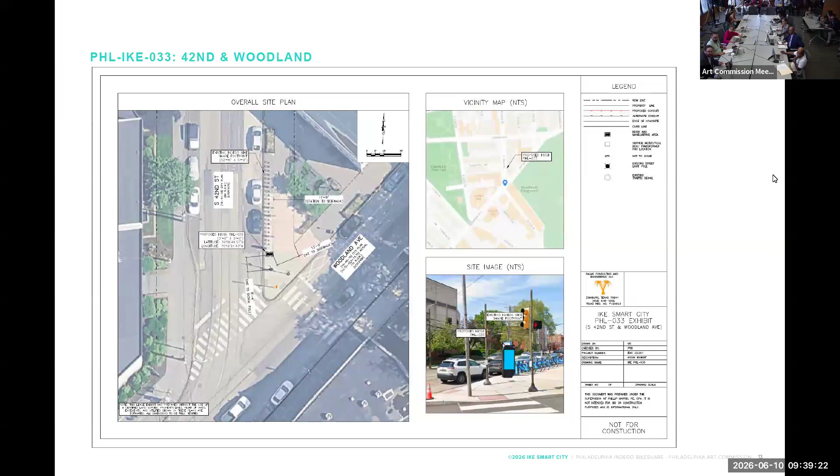And am I correct in understanding also that some replace prior models of information posts? So it depends on the age of the station. The older bike share stations have a larger pylon, the newer ones don't. So it depends, you can see on the individual drawings if they have this older one, so there'd be 2.

The one is like the brains of the station. The newer ones don't have the large pylon, it's much smaller. And then the Ike is an additional piece, let me see if I can find a good one. This is a newer bike share station, so it doesn't have a large pylon, it's just the Ike on the right.

So what is the reason for leaving the old one? The old one is like the brains of the bike share station, so this is an old one, the existing is in the middle, and then the Ike is on the right. Right, but all of them don't have that. I think we'll have someone who can help answer. Thank you, yeah, just trying to understand.

Yeah, no problem. Good morning. The mechanics, did I explain that right? You did, yeah, you did a great job.

Good morning, Commissioners. My name is Laura Bowles, I'm the planning manager for the Indego Bike Share System. So when we launched in 2015, we launched with what is considered the second generation of the technology, which has that large brain attached to it. So when we use the second generation of technology, we cannot remove that brain, otherwise the station will not work.

So over time, as this tech is just getting old, it's been out in Philly streets for 10 years, that tech is being replaced with newer tech, but we are not going to scrap all of our existing stations and replace it with the new technology. Thank you. James?

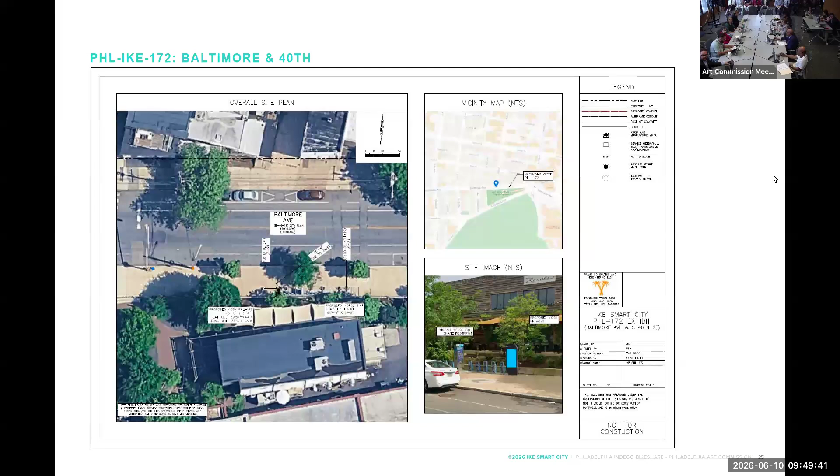We have a presentation for final review. This is the 59th Street Bridge.

Question, when were they last here? Ryan Sen from the Streets Department is here, and then we have someone in the virtual audience as a presenter also, two or more months ago. Two? Good job.

Hello, Commissioners. Good morning. My name is Ryan Sen, I'm Streets Department's Chief Bridge Engineer. Virtually joining is Matt Ward from the consultant bridge design team. Also joined by some others from the city staff who are helping progress this project.

So 59th Street, we presented for conceptual review back in November of last year. There were many very good points raised. We had a bit of homework to do, primarily to go back out to the community and make sure that some of these topics that you raised last time are fully thought through and fully addressed. That's what we've spent the last several months doing. We're back here to present on that. We've prepared a slideshow. The first half of it, I would say, is what you saw last time. The latter half addresses the concerns that were raised.

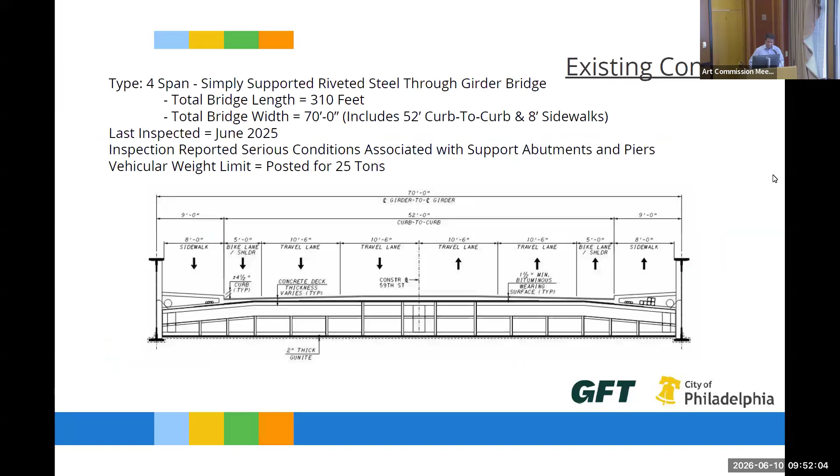Okay, so here was some of the supporting documentation addressing the specific topics that were brought up. I'm going to go to the slides, and when we get to the slides that deal with the issues, stop me if I'm going through it too fast. I'll go right back to the beginning.

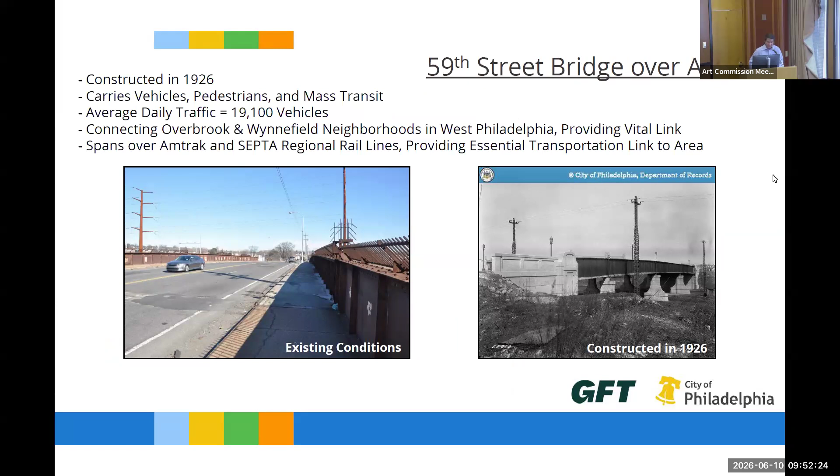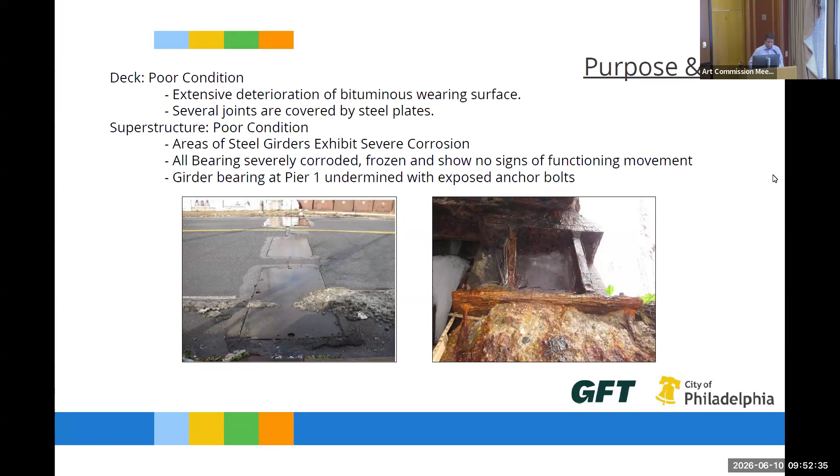59th Street Bridge, I believe we're all familiar with the location up in the Overbrook and Wynnefield neighborhoods. Here's a picture today on the left side, a picture from around when it was constructed back in the 1920s. Here is the existing cross section. This is all material that we shared last time. Existing photos of the bridge showing why this bridge is in poor condition and the project needs to occur. More photos showing the level of deterioration that we're seeing out there.

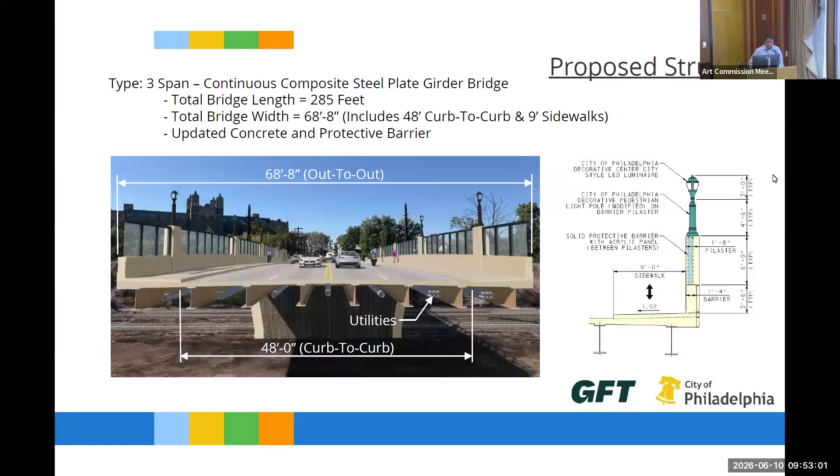This was a rendering showing the cross section that's proposed, showing that it'll operate similar to how it operates today, except that we're going to widen the sidewalks, designate them a shared use path so that cyclists and pedestrians can use them. The current sidewalks are 8 foot wide. In the proposed condition, they're going to be 9 foot wide.

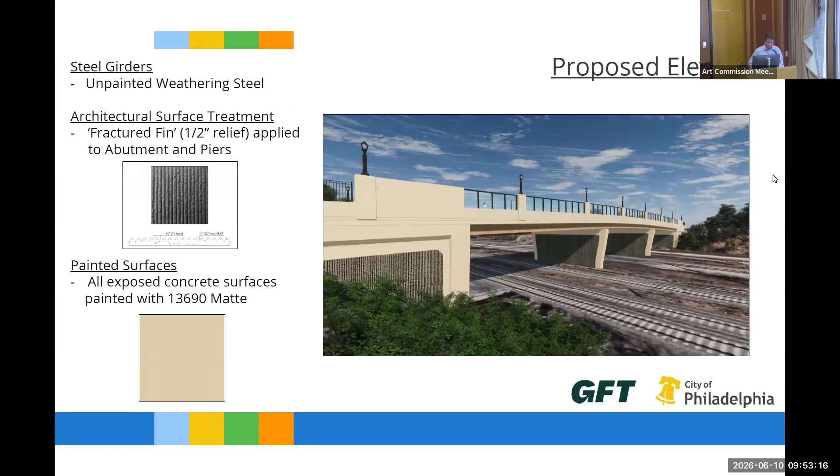These were showing the different architectural treatments that we're proposing, the fractured fin finish on the abutments, and the color we were selecting here was that matte kind of beige color. These were some slides showing how it would look from the pedestrian experience, showing all the different features. And some of these are subject to what we're about to talk about, so just flipping through existing.

So now we get to the first concern, which was related to graffiti deterrence. And it's a great point. We believe that we're going to be providing surfaces on the four quadrants of the bridge for future artwork. We are going to be adding an item to the contract to apply anti-graffiti coating, and that will help make it so that the graffiti can be removed much quicker.

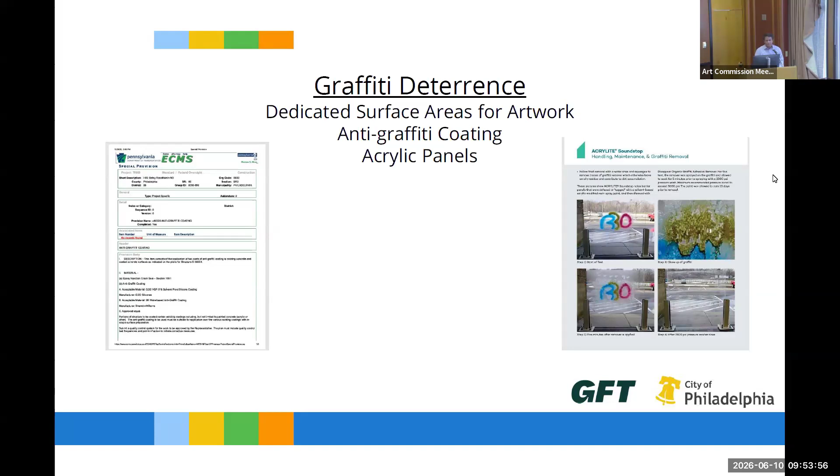When it comes to the wall materiality, you wanted us to look into different materials to face the walls and the bridge, and I think it was tied back to the objective of preventing graffiti. So with the first topic, we're addressing the graffiti by applying that graffiti coating, graffiti removal coating.

When it comes to wall materiality, we did look into applying a kind of stone finish. What we found is that in order to do it over the railroad, if we were to apply real stone to the inside face, we'd want to apply it to the outside face too, but that becomes a problem with the railroad, making sure the stones don't come loose over time and fall onto the railroad below.

We looked at form liners and painted form liners, but we didn't feel that solved the initial problem of graffiti coating, and it might actually complicate addressing the graffiti if it does get tagged. Additionally, it honestly doesn't look as good as natural stone in the first place. So we believe staying with the concrete barrier is the way to go, just beefing up the graffiti protection.

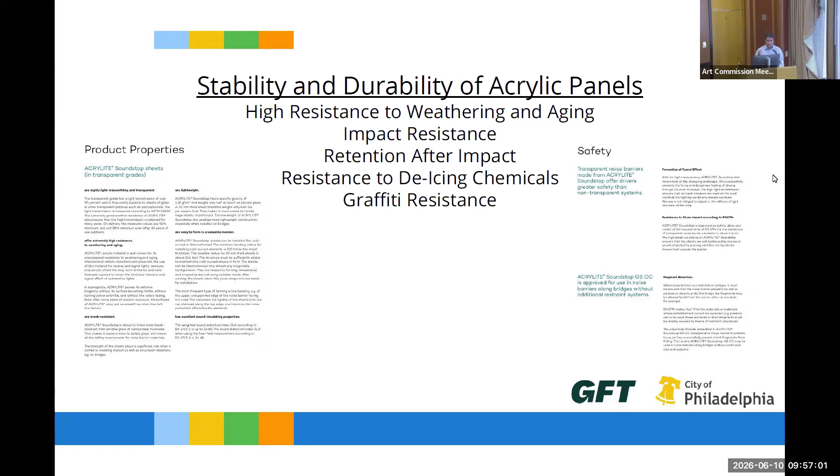They're going to be clear, so they let sunlight through. It's not going to cast odd shadows on the bridge. It'll create a much more open feel for bridge users crossing. It also holds up well to the weathering salt we apply in the winter time, so we think this is a very durable solution. It's been used on the 41st Street Bridge and several PennDOT projects in this area.

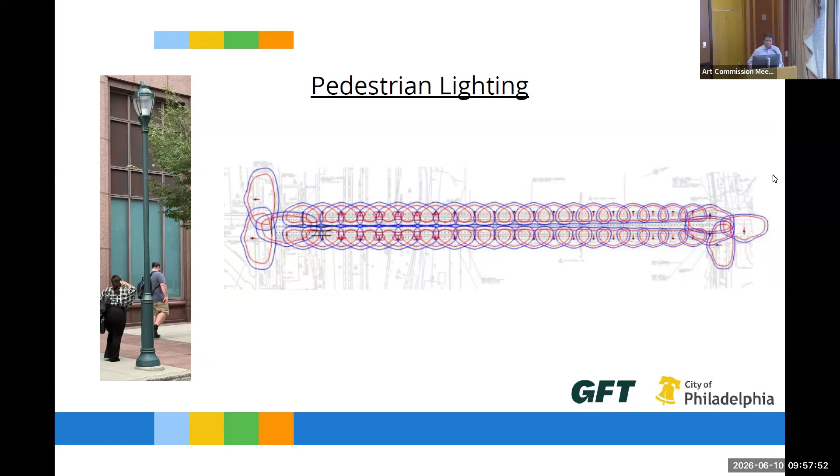This is what I was talking about earlier, that there's going to be a dedicated area on all 4 quadrants of the bridge for future artwork.

We did reach out to the community. After talking here in November, we coordinated with SEPTA and got to the bottom of a couple things about student access. We then went to the community twice in April, once at Overbrook High School on April 8th, and on April 30th on the other side of the bridge in the Wynnefield community at Masterman Charter Elementary School. We presented to the community both times.

The general consensus was that they understand the project is overdue and needed. There were concerns raised about student access during construction, since the bridge is going to be closed for 2 years, 26 months.

We are able to say now that any student who walks across the bridge will be eligible for a SEPTA key card during construction, so they will be able to take the SEPTA G route that's up there.

The specific detour route of the G will be determined by SEPTA as we get closer to construction, but the detour route will make all students who walk eligible for a key card. They will get that through their school, and the school will coordinate with the school district and the Department of Ed on all of that.

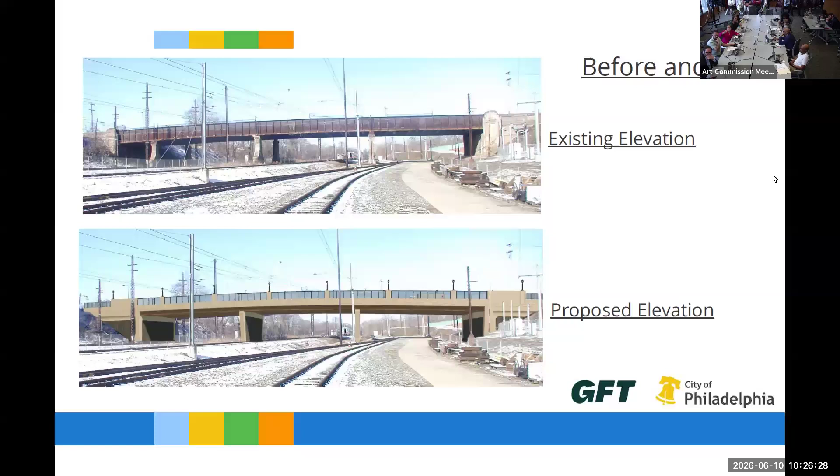Thank you, I think that's helpful. The other question I have is, this clear acrylic almost wall on both sides of the bridge, are there going to be dangerous for birds? For example, is there any kind of texture or something that avoids birds from crashing against it?

I just want to add to that response. The products that we are looking at to use for the acrylic panels do have filaments that are actually embedded into the acrylic panel that are designed for bird impacts. So it's been shown that using this filament process does deter that.

Thank you. Okay, so I'm going to wrap up this item. There are two things - Troy, do you need to see the renderings of the bridge to make your vote decision clear?

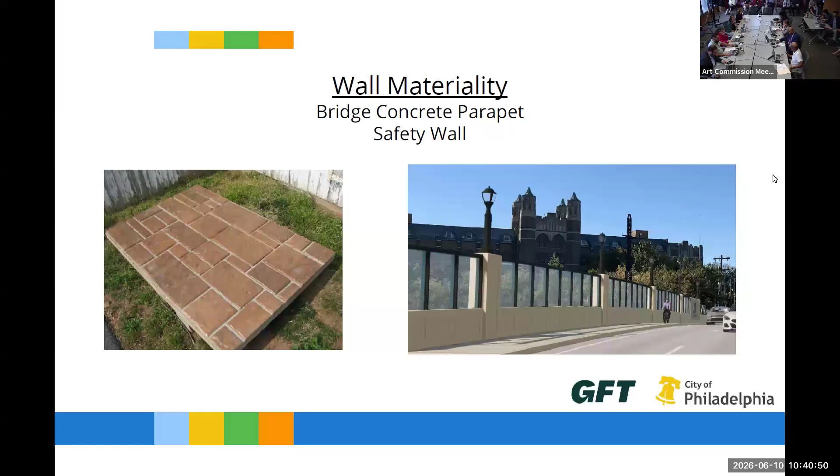Up next, we have a presentation for concept review. This is the Avenue of the Arts Median Project, a sculpture at South Broad and Spruce and Pine Streets.

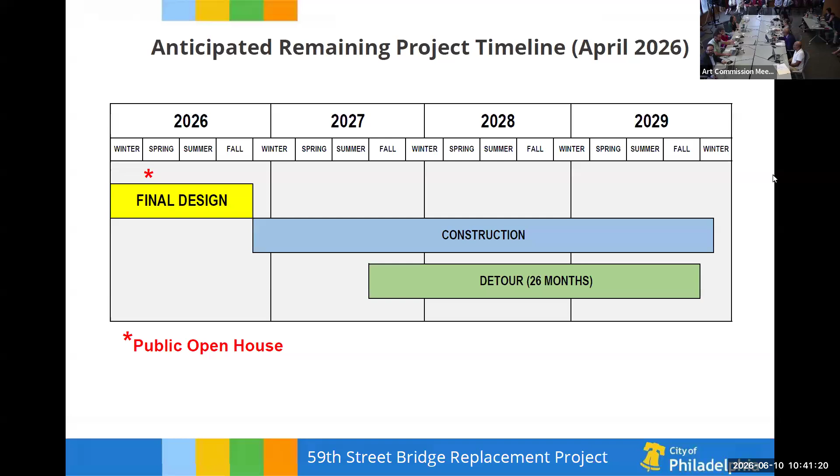Yeah, I mean, I kind of just... Yeah, yeah, it's ugly, and I think they think it looks neat, but it's like, it looks inhumane. Like, it doesn't look lived in. Miguel, that's you? We're ready. I mean, you see that in restaurants now, they have like the exposed brick, or some element of the original fabric, just slapping something over it. It's just like gross. Whenever you're ready, you can start.

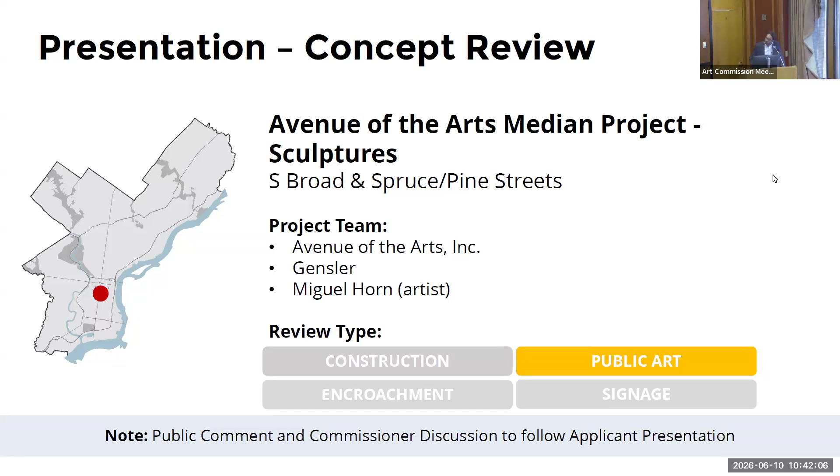All right, yeah, good morning. Thank you, good to see you all again. Commissioner Matt, good to see you back at the Art Commission. Thank you, doing better. So, this is actually a really exciting project to present to you all. I'm super excited about this because this has been a project I've been dreaming of realizing for the better part of a decade.

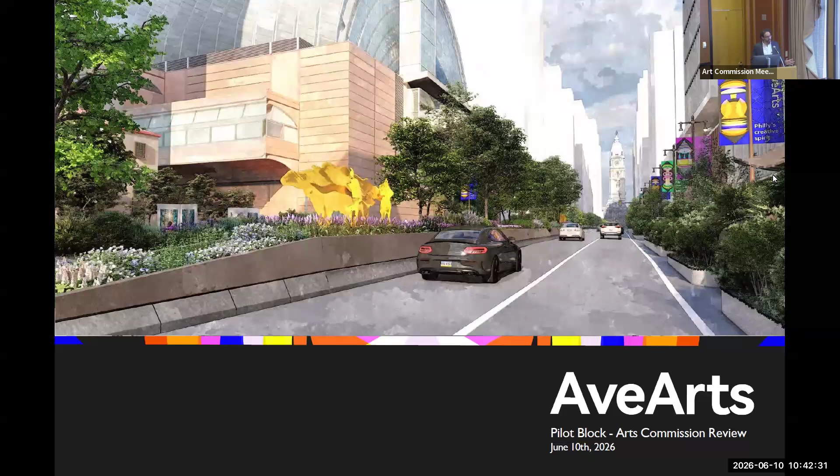And when this opportunity was first introduced to me, I received a call from Julia Guerrero, Civic Centered, and Tom Miles, who's on the committee for the Avenue of the Arts. I had no idea about this envisioning for South Broad and Avenue of the Arts 2.0. So as I learned more about this project, I just fell in love with what is going on in South Broad. This is such a cool project to be a part of, such a cool project for our city.

And I just wanted to start out by giving a little bit of context of this space. The median for South Broad Street, which is again being called Avenue of the Arts 2.0, is getting a pilot median reimagining, which is ongoing, is happening right now, and is actually pretty well on its way. This commission, or members of this commission, saw the median presentation previously. So for those who are not part of it, just a couple slides here to give you some locations.

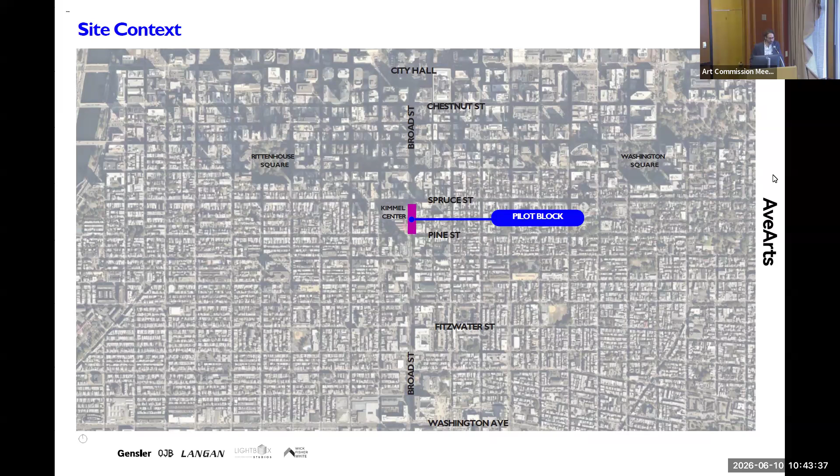And if you've seen the construction in South Broad, the Spruce-Pine block just in front of Kimmel Center, Arthaus, the VIA, Village of Industry and Art, is smack dab in the middle of what's being described as the theater district. You can see where this fits into the kind of future plan of the closer blocks to City Hall, and then the further extent. All of these blocks have an envisioned plan by Gensler Architects to engage throughout this dynamic public space.

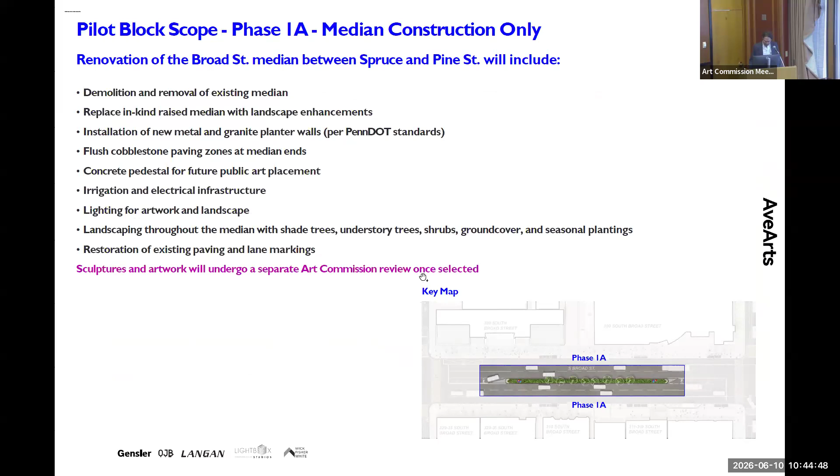So I'm super honored to be the pilot artist for this pilot project. You can see these plans have described parts of this median. There's modifications to raise up this central barrier, include some trees across it, and then there's these kind of sloped areas that rise up to the full height of the median at either terminus. And when this was first proposed, you could see at the very bottom it points out, sculpture and artwork will undergo its separate art commission review. So that's what we're here for today.

This shows the extents of the Phase 1A median, the dimensions of this first span. This is an updated slide of the trees and their locations. The species have not changed since the original presentation, but their orientation and placement have shifted together to allow our art installation at either end to have a bit more space.

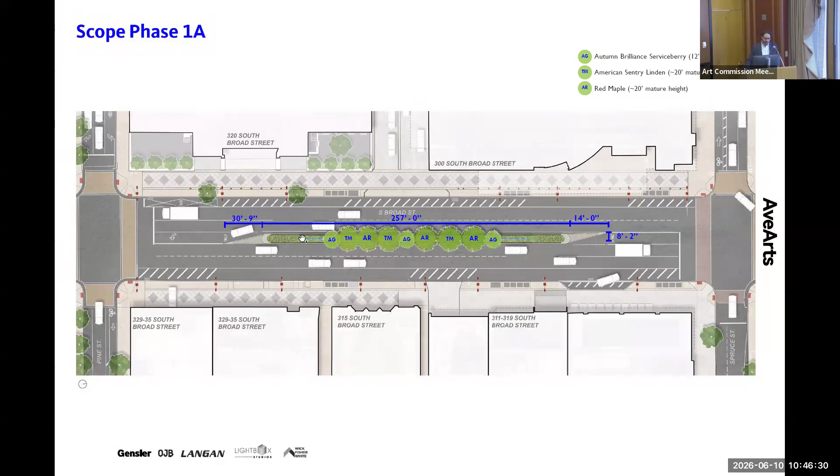If you look just outside of these two outside trees, you can see a connotation of this squiggly line of what we're looking at.

So design inspiration for my piece, my proposal today, comes from Broad Street itself. For the past 10 years, the better part of that, I've been using LiDAR scanning equipment to capture existing conditions for sculpture projects and installations. It's basically a tripod-mounted 3D scanner that spins around and captures architecture, space, static elements.

But what I didn't realize was happening at the same time was, as you can see at the lower part of this presentation, anything passing in front of this scanner is also being collected. So as I was standing in front of the Pennsylvania Academy of Fine Arts building, I thought this would be a beautiful piece of architecture to scan and capture.

This woman was just sitting at her phone, sending a really involved text. You can see at the bottom right, the scanner was positioned in front of her, so it only captured like a leaf of her form, a small digital fragment of that pedestrian, standing there having a very personal moment.

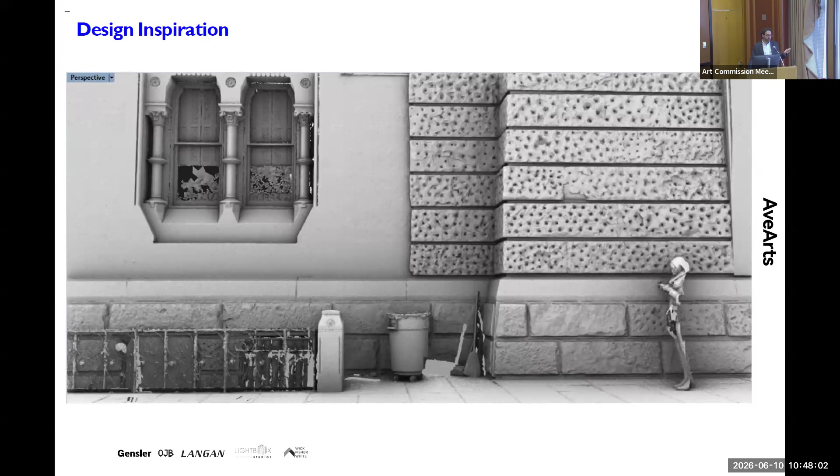As I moved the computer software around to the side of her, I saw that she was just this simple shell that when viewed from one side looks completely normal and natural. But as we move around her, we see this is an artifact of the scanning process. I found this to be an incredibly interesting aberration from this very technical engineering process.

As I floated through all of these different sites, I found all of these pedestrians, all these Philadelphians just going about their day, enjoying these public spaces. This guy was mean mugging me the whole time because he was really like, what is he doing, what is that piece of equipment, I don't trust you. But you see these survey guys around the city all the time, and this is the equipment being used for that.

But what it's not used for is capturing anything that's not static. So this section of the Reading Terminal Market at Filbert Street was just flooded with pedestrians walking by, and these movements across this space created this tapestry of figurative elements, abstractions, and I fell in love with this. For the past 10 years I've been writing grants and proposals, submitting this kind of work for other opportunities, and thankfully I found people who have a vision to see what I'm looking at here.

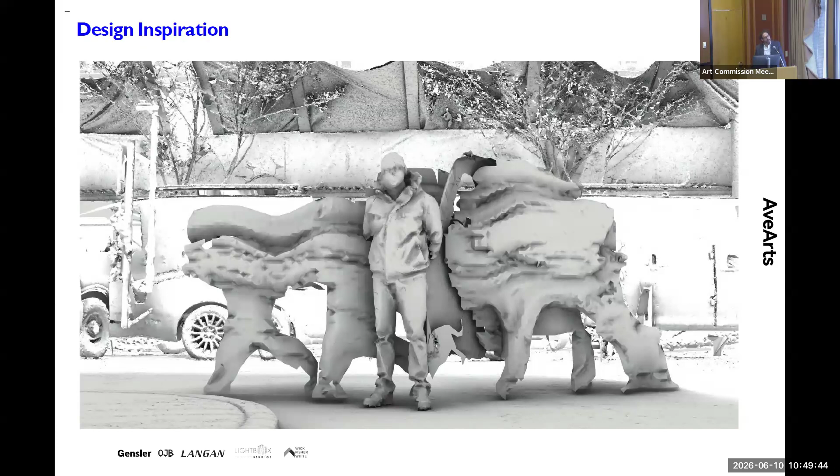What you're looking at now is a self-portrait as I stood in front of the camera, and then somebody slowly walked past me as I was standing still. This Muybridge-like study of movement was, for me, the most compelling thing sculpturally I've seen rendered on a computer screen in years, and I've been trying to figure out how to manifest that into a physical form.

When I first looked at the median of Broad Street, the constraints were quite significant. We have a 4-foot footprint to work with, and a very long composition. I immediately knew this would be something that could fit in that space. I went through these scans and selected different movements of people stretched out in this experience of walking across the scanner.

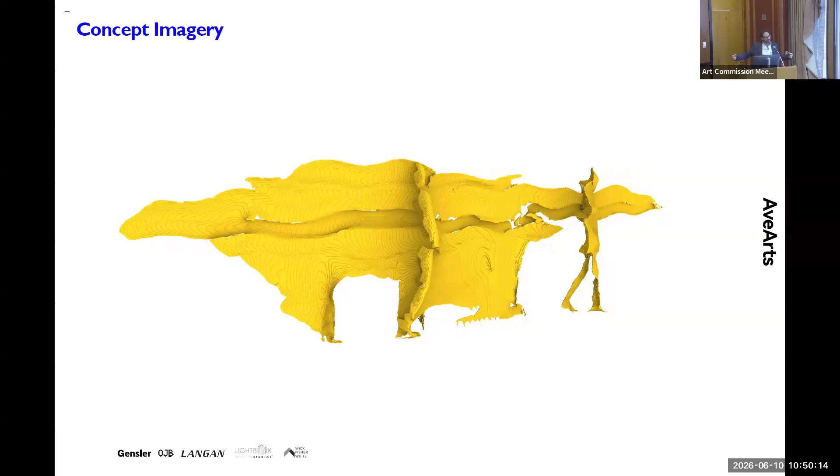Some of these concepts show elements of people moving from one side visible literally, to the other completely abstract. If we find ourselves in the cardinal viewpoint where that scanner stood, for a brief moment everything aligns to give you a very literal pedestrian image of a person standing still or in movement. But as we walk around it, it becomes abstract, it stretches, it becomes an aberration of that person's gait, that individual pedestrian movement.

I thought it'd be interesting to play with this composition so that as you're moving past it, whether in a vehicle, on a bicycle, or on foot, you have different speeds with which you experience this transition across the space. As you move across it in a vehicle, that's very fast, you get a moment of perception of that literal person standing in that space, then it moves very quickly, and it makes you slow down — almost to the pace with which that original scanner was moving.

So I'm proposing to create this, as you can see with these in my typical topographical construction, laminated layers of steel, in this case powder coated. And if we look at the material presentations here, there's this RAL 1028, a melon color. It's a very vibrant, warm tone.

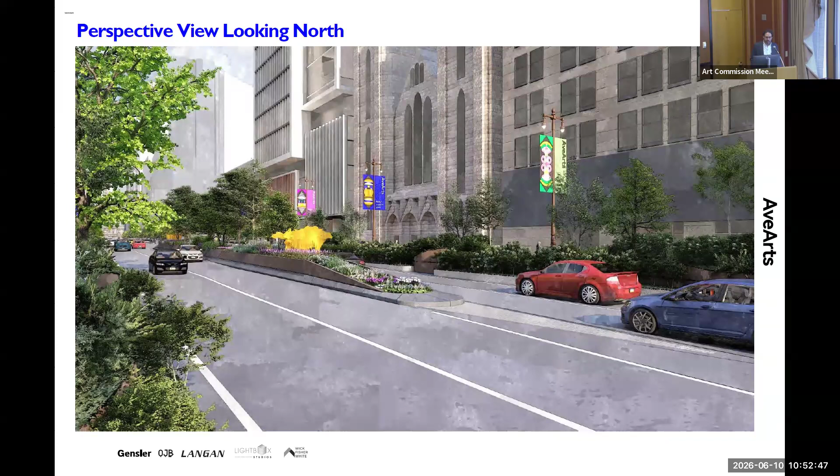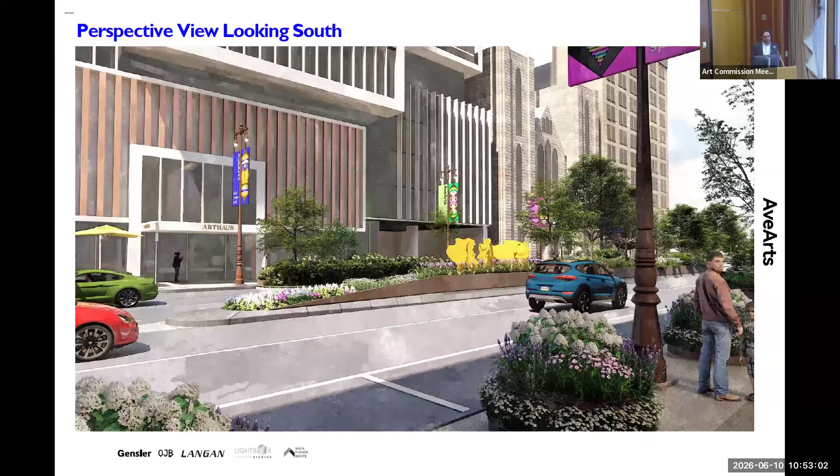And this is from the same, opposite side of the street looking south. You can see the Broad Street Ministry and Arthaus in the background. This composition is visible from both sides, similarly—on one side it's a little more abstract, the other side has a bit more composition of figures with it.

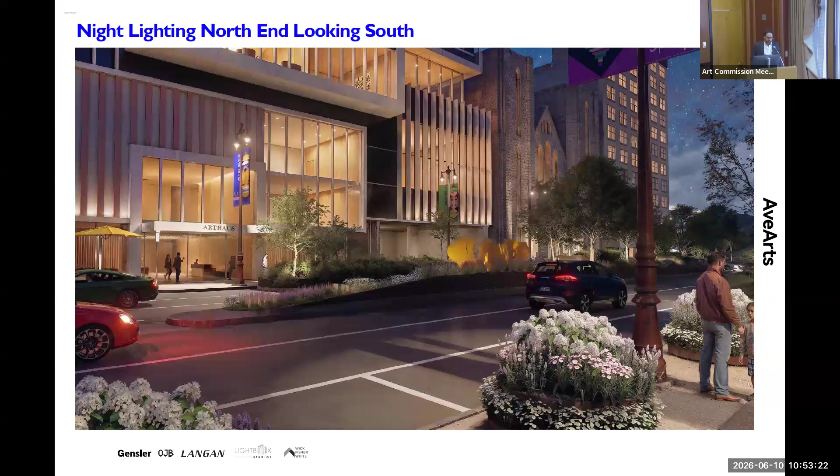In these last two renders, you can see these kind of night vistas of the forms. These have included the existing site lighting for the trees and the median. We will also be including pedestal lighting, which will add additional ambient light to the space and spots.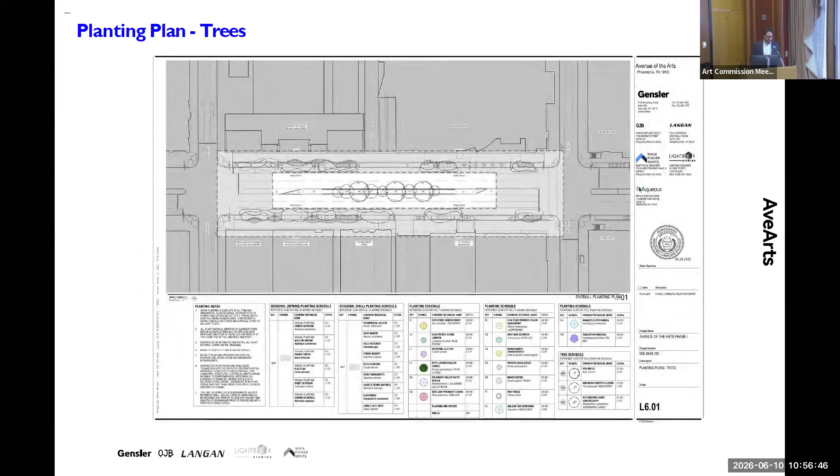These are the updated tree and planting schematics provided by OJB since the last meeting. So we can see what those planting schematics would be in relation to the sculptural placement at either end, and the planting schedule.

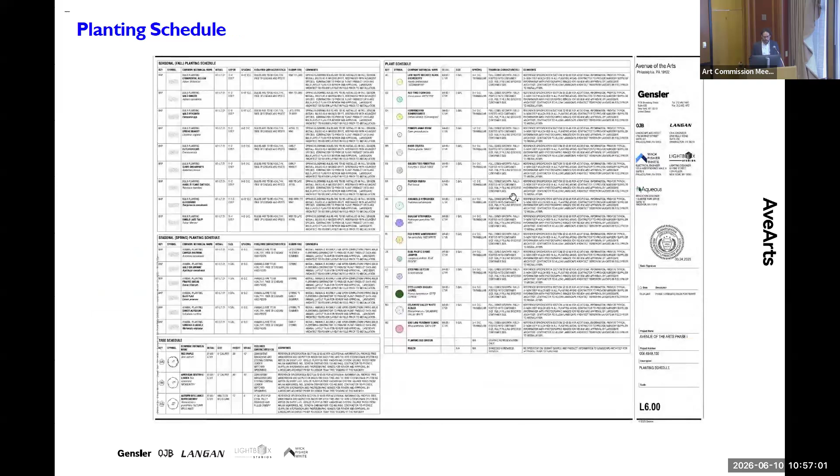And I included in here an updated lighting plan as well, specifying not only where these ambient lighting locations will be, but there's a detail of the specific lighting. I think those slides might be out of order, sorry.

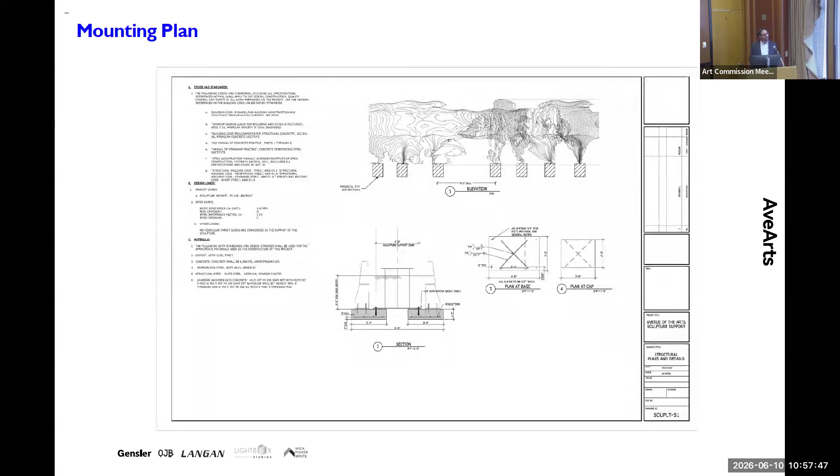This is our mounting connection. You can see this is the pedestal location, and we're tying in with L brackets at the base of each sculpture into those locations. These secondary static figures are also helping to act as a kind of lateral support, spreading out the axial orientation so it has a wider footprint along the base. These are the shop drawings of those half-inch plate construction pedestals, so they're quite robust.

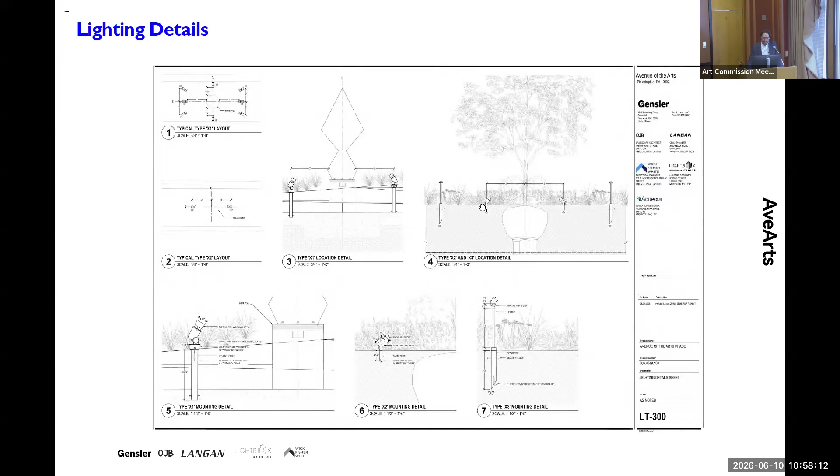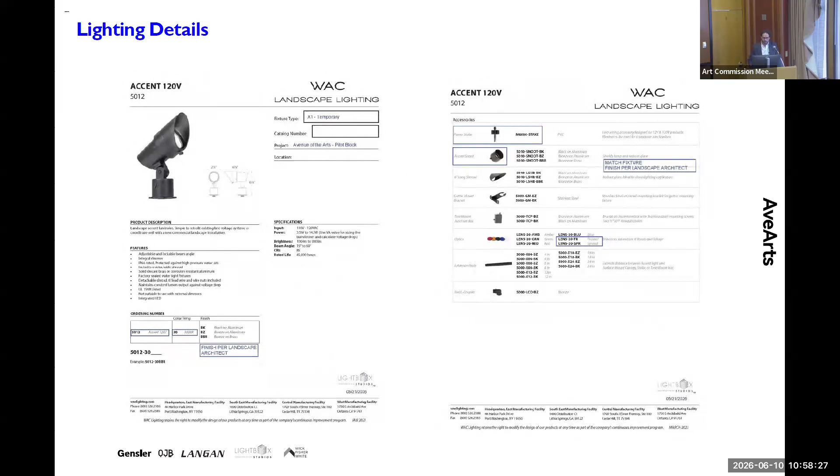And here's back to some of those lighting details. You can ignore this as the previous sculpture location, so this is not where it would be, but these are the stake lights and then the pedestal lights. This is what's going to be the spots on the actual sculpture. This is the detail of those light pieces and the specifics of which finishes and lenses are going to be used.

Thank you very much. Oh, very nice. Commissioners?

Thank you for the presentation, I have a lot of thoughts. One of the questions I have is, are we looking—this is for concept approval—are you proposing this as the final artwork right now? And are you still in the process of working through the piece?

So we would love to get concept and final approval from the Art Commission today. We have a schedule that is intended to move forward with production and installation this fall. We've done extensive work from December through today in selecting the compositions which would best fit with this space and this opportunity, but also work within the constraints of that and maximize the impact.

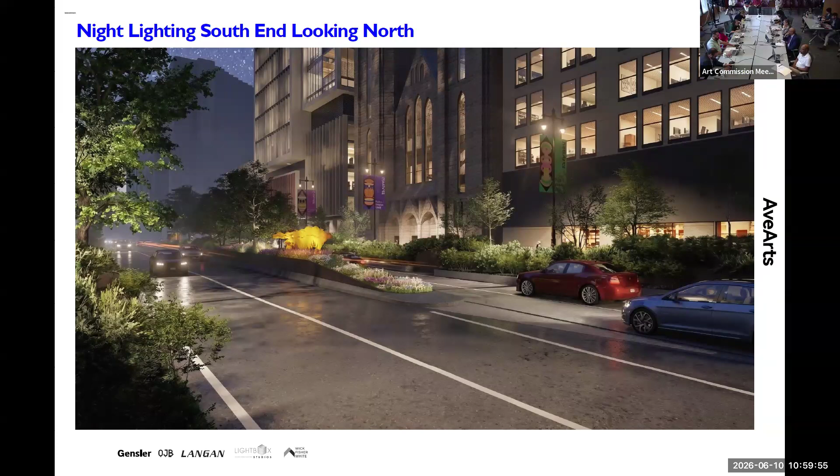Thank you. And the other piece—I appreciate you showing us the different sight lines you're required to work from with lighting and all of that with PennDOT. Are people meant to be able to walk up to this median or no?

No, I don't think so. I know the medians have been part of the experience of Broad Street, and I have some feelings about this. But anyway, you all are moving forward with that, that's fine.

But I see the elevation—I don't know which slide number it is—but it's showing how this height compares to a human scale, and it made me wonder, are they able to walk up to this, or is it just meant to be viewed? That's actually part of the sculpture. Okay, got it, got it.

Yeah. Or Penn or Phillies, or next year the Sixers.

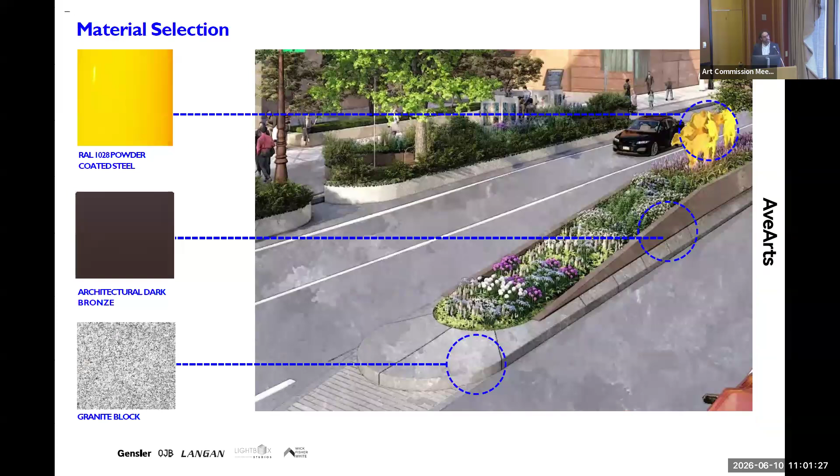I will say this—I want to acknowledge what Commissioner Matt said. One of the things I received as feedback, and heard as feedback on this plan, was that this is our pedestrian space. Broad Street is a pedestrian location, right? Somebody raised the question at the DAG presentation last month: this is a space where people congregate, they take photographs here, graduation photos, wedding photos, they even get haircuts. This has always been a dynamic pedestrian space.

And that's why I think this content, this design, really speaks to this place, reminding everyone this is what this is about, right? This is us, these are Philadelphians, portraits of pedestrians in movement across these spaces. I find this to be a reclamation of our public space through this kind of figurative artwork. As a figurative artist, I'm constantly trying to find opportunities to bring the human experience to the forefront of these public spaces.

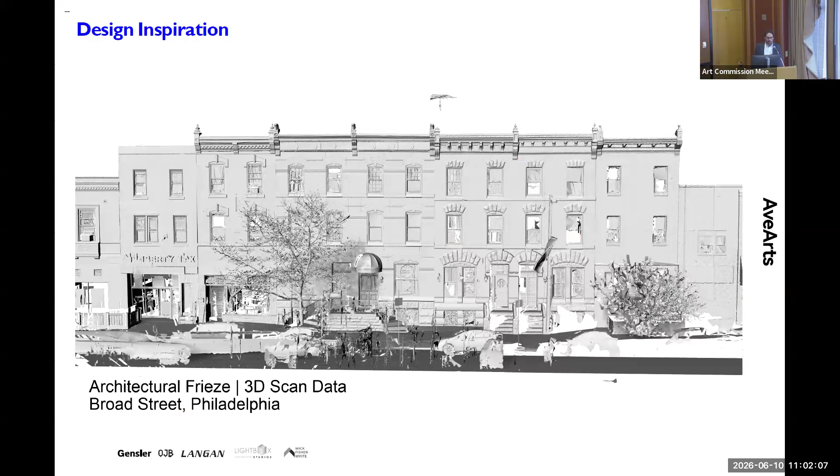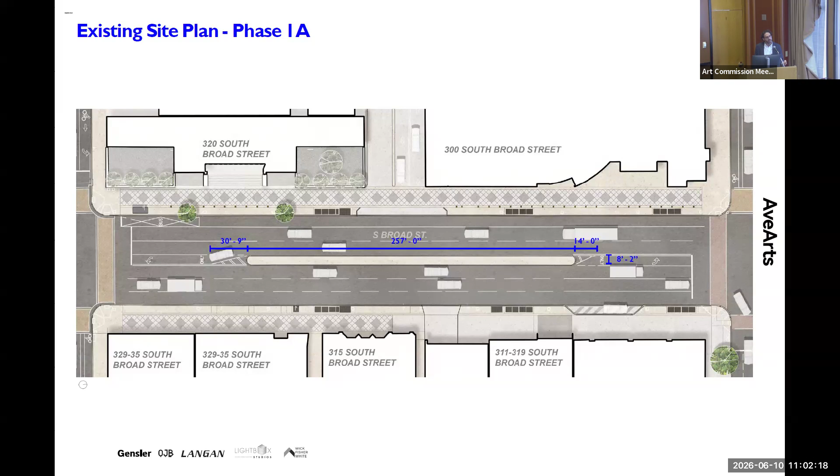Now, I understand there's this question about how pedestrians will not be able to access it—isn't that removing the trees, changing the nature of South Broad Street? When Gensler addressed this question with OJB, what they said was, this is as far north as plantings and trees in the median will go. So this block is where those sightline disruptions, the median interventions which remove that from the pedestrian experience, occur—this is as far as that goes, and each block will be treated differently. I thought that was a beautiful way to honor that space for Philadelphians and not take it away from us.

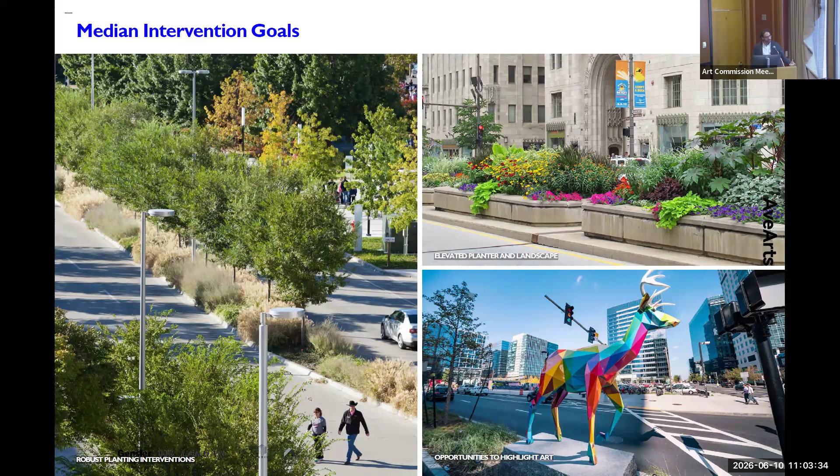Yeah, so okay, I mean I do really like your piece of art. Go ahead, James.

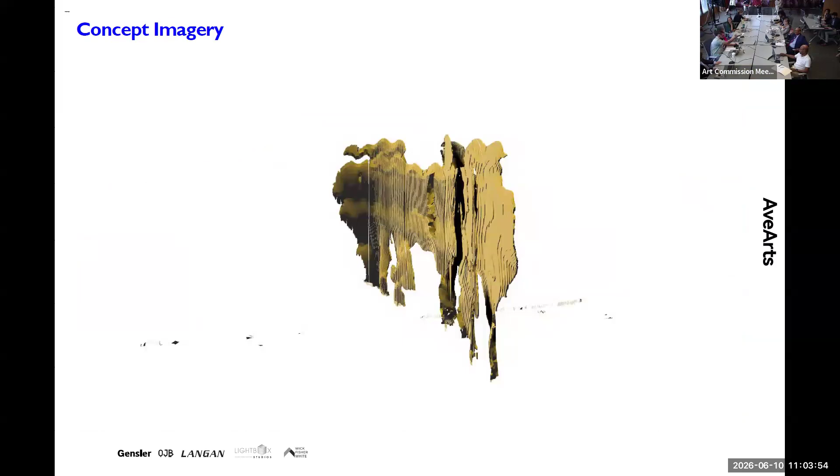I think the art, the concept and everything is on point. The question I have, and I think I mentioned it about the landscape materials, is I get it - this is the only block that has the super image of greenery and growth and trees. My concern, and it's not only about the piece of art, but also the height of the shrubbery and how much height it takes. I'm thinking of public safety - cops coming down the street looking for somebody, and they can't see the other side, not only because of the two pieces of artwork on it, but the trees, the foliage, and the height, and they're looking from their cars for somebody.

Had there been any thoughts on your artwork? It looks like it's a solid structure, without it being in any way perforated. I'd hate to - I mean, other than some of the shapes kind of creating some openings, it almost looks like a solid piece.

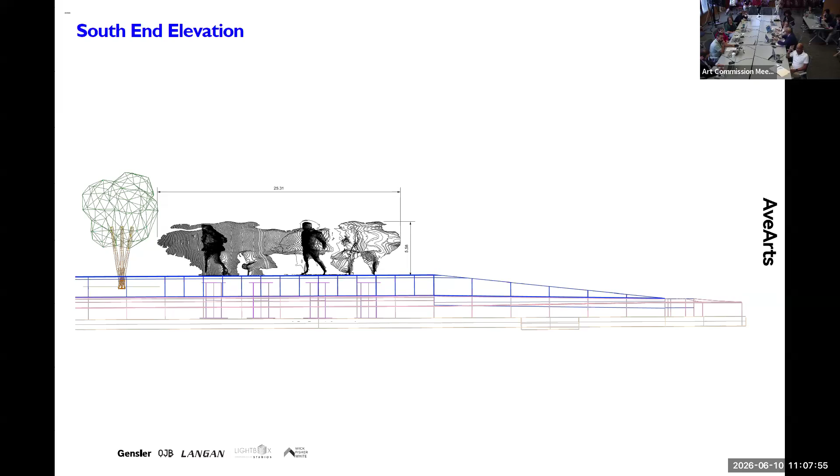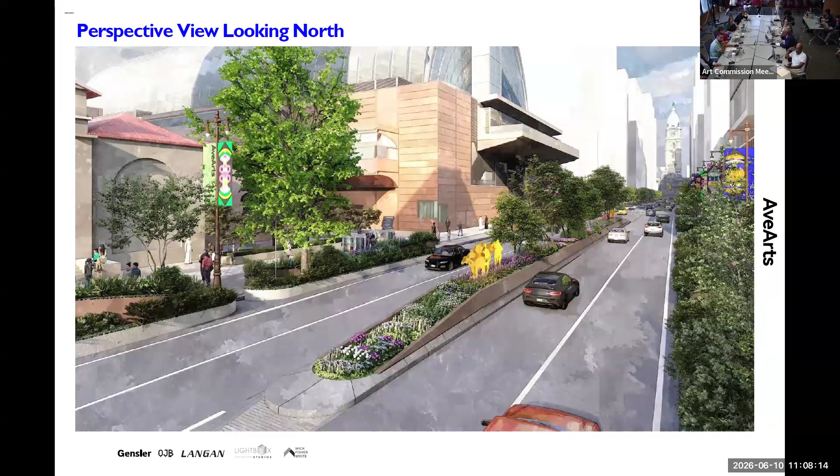Most people - so although I understand what you're saying, there's a level of subtlety and interest in the way that you describe the sculpture, and I'm sure it's there. But the reality is people will be moving very fast and they may not be able to appreciate the level of detail that you described. And those are people in the cars. People walking by are going to be - I don't know how far away. So will they understand the same level of detail the way you describe? I'm sure there's a way to do that, but I don't know if what you're showing is capable of performing at that level at this point.

And I think that goes directly to whether we approve the sculpture, final conceptual and final approval. I think for me it'd be interesting to know the material the sculpture is made of, how you intend to make it. Is there a level of transparency? The way you describe the light reflecting off the contours seems very interesting, but how exactly will that work?

Depending on the time of day and the sun angles, the detail of how the base is attached to the pedestals, the way that you described it, could be very interesting, but it really depends on the detail of how those connections are made. So the way that you describe it, it could possibly be done, but a lot of the answers should be addressed in the way the sculpture is developed in the details.

If I can remark on the first point you made, vehicles passing by this at a certain speed versus pedestrians and cyclists, every one of those are going to be unique experiences. I think what's really interesting sculpturally is that those offer you a bit of uncertainty of what it is you're perceiving. That moment of uncertainty inspires you to look into it further, a bit of inquiry into the shape, what it is. And I think that tension of uncertainty is what's compelling about this composition.

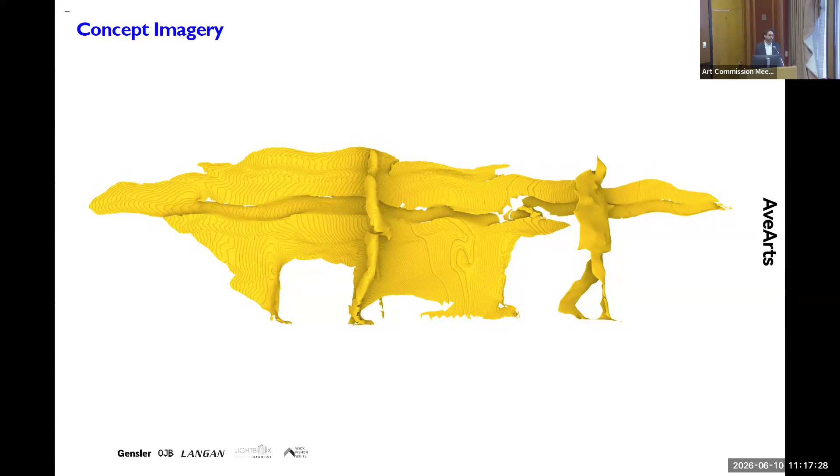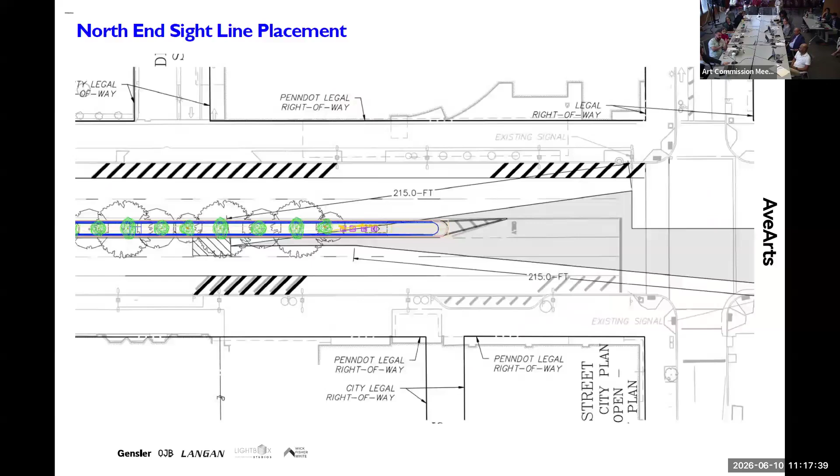Sorry to interrupt, but now that you mention it, because I won't be walking north, I mean south to north, I won't be able to see the same figure from the south. If I'm walking on this side of Broad Street, I won't be able to see the same thing. But this one, I don't know if it's possible, I'm not saying it because you do that type of work, it will seem almost identical on a different angle. You follow what I'm saying?

Yeah, and this way, if you put it in yellow, I will not be able to see the man on this side while I'm coming down to South Philly. Then same, I don't know where it's gonna be, that person, it's not gonna be the same image if I'm walking. I don't care about vehicles, to be honest, this is for people who are walking. I mean, I do care, but I'm mainly for people who are walking.

Another thing I was going to suggest is, in each corner, like on the south side, before people cross, it would be nice to see something, a QR code with a little picture on the edge, before you walk. That way people will know, oh, this is the picture in there, so at least they know what they're seeing when they're crossing, and at the same time, what they see when going north or south.

To that point, I think a similar note was, we presented this to Creative Philadelphia as well. They endorsed this project. They really appreciated what we brought. They said the same thing.

If we're here standing on the sidewalk, could we maybe potentially include a plaque or a symbol or a QR code that tells this story about what this is you're seeing? It's supposed to not be obvious, but you could also have these touch points at the four corners of this, potentially.

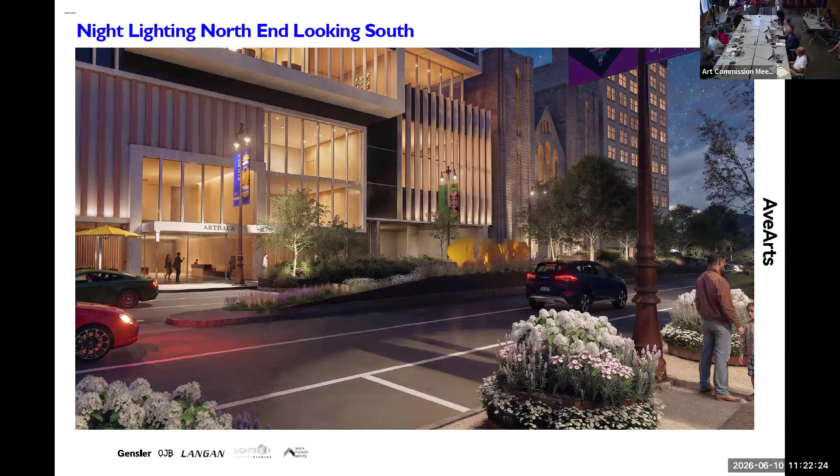That's all, I'm sorry. I'm Carl Dranoff, chairman of Avenue of the Arts, Inc. We're the group that initiated Vision 2.0, which is intended to transform South Broad Street, now known as Avenue of the Arts, from City Hall to Washington Avenue, into the greatest street in North America. That's our goal.

We have a fantastic sculpture here. I love hearing that you want recognition for the artist and an explanation. That can definitely be part of Phase 1B, which is the sidewalk phase. That's where we could put plaques. You may not know this, but there are plaques embedded in the sidewalks from the Music Alliance. And I can foresee something like that, or maybe even elevated on the wall of Kimmel Center or Arthaus that could explain what the art really is.

I appreciate that, that background. That's clarifying, because part of why I asked is this Creative Philadelphia or someone else, is to understand whether that would be part of the decision around concept versus final. Because for me, I think knowing what this is and trying to offer people more access to view it conveniently versus seeing it from a distance and, like I said before, tempting fate.

We don't want them dodging through traffic on Broad Street. So I'm trying to figure out, should we link it to this decision or should it be separate? That's kind of where I'm at.

Yeah, thank you. No, go ahead, Senator. Oh, I just have one other thing.

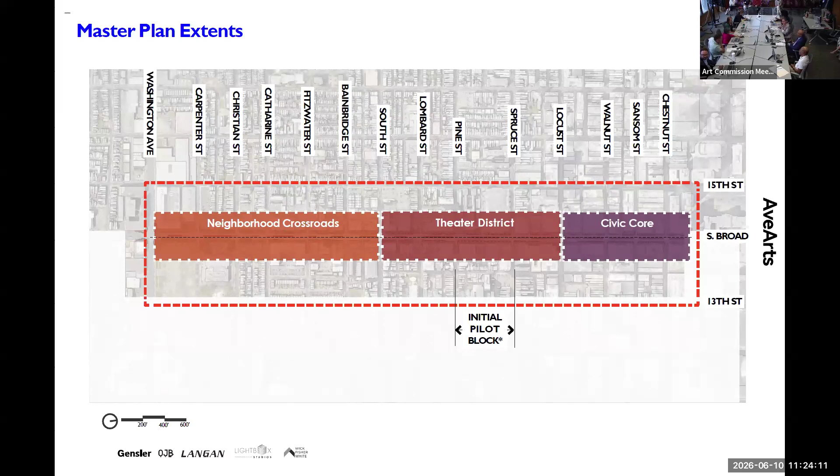When you were talking about the four-way views, you have two people on one side of one sculpture and two figures on the other side. This is just a consideration, but did you consider each one having one person on one side and one on the other? Because then no one would miss it, you'd never see the backside of one or the other depending on which way you were going. I don't know if that would ruin it for you, having a figure on each side.

No, and I appreciate this comment because actually the compositional construction of this was so much decided by all of these limitations of setback and PennDOT sightline. So we're hugging just the very border of that sightline, which is really one of the most determining factors on one side. And we played with all kinds of different orientations, actually having the more flat side of the composition being front facing.

To the south end. If you're thinking south end heading north, the first meeting you have with these pieces, do you make it so abstract that there's nothing on that side and the figures on the other side, so that when you come to the other side of the median you have a lot more of a literal moment?

Ultimately, what I came to in my compositional understanding of this is that this is not a singular experience. This is a dynamic space that you're going to see multiple times, whether on a vehicle, so it's not like you got one shot at this.

Giving just enough information at your first experience, either the southern terminus heading north, allows people to see just a little bit of a tidbit. When you get to the far end and it's the flatter side because we're hugging that sightline, you already have enough context that you're trying to piece it together, and that you then maybe circle around and take a look at it again. It makes you want to come back and see this multiple times. It's not like an individual experience.

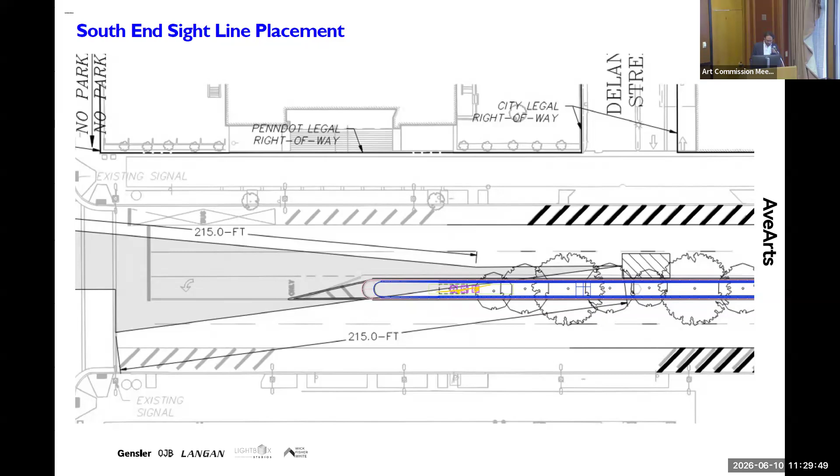Coming back to these perforations, this makes a great two-dimensional image. These lines look beautiful as a print, as a graphic, but they don't translate to three-dimensional form really well. What's interesting is those lines delineate three-dimensional form - your eye reads that form. I've been trying for years to make this three-dimensional, and I keep coming back to this being a two-dimensional shape. I make prints of this, all kinds of graphic images, and it works like that. I think this is good to describe the form on this screen.

But the construction of this as a linear kind of thing would be so flimsy. I would really be concerned about allowing the public to come near that because they would just break it or bend it. So the plate construction gives a much more rigid shape and form for the public.

That's all 3/16 quarter-inch steel and powder coated with the RAL 1028. I don't know if I glossed over that, but it's similar construction - same thickness, 3/16. I didn't bring the sample this time because I figured I bring it every time and it's just redundant.

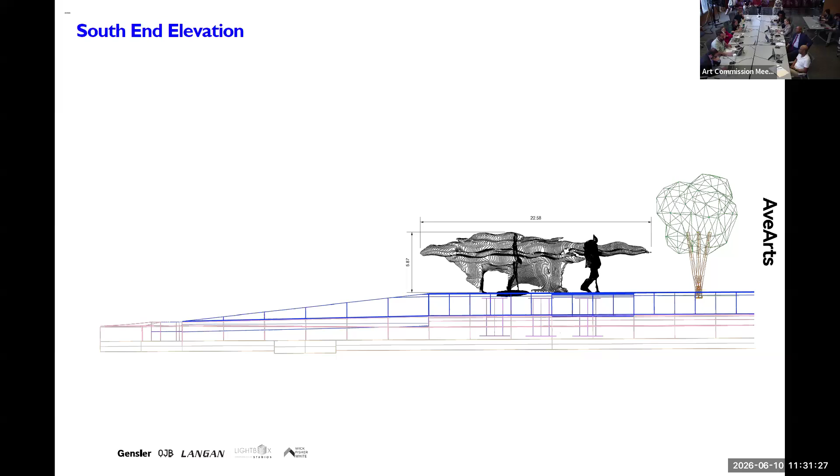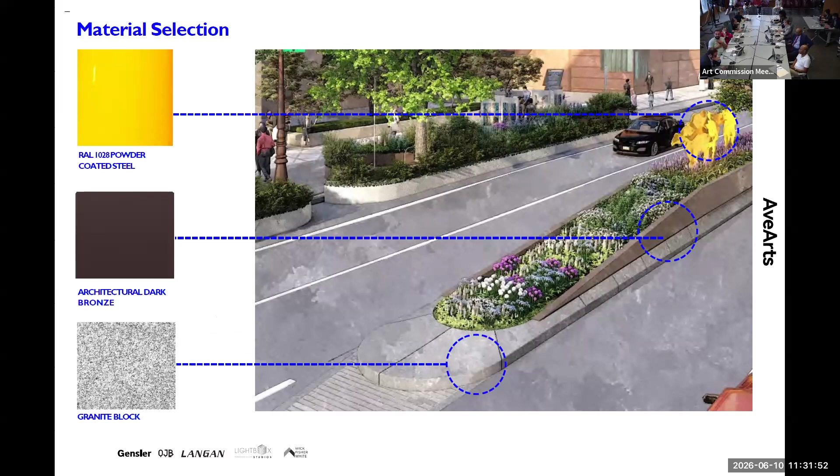Miguel, I think we should see the material, because the only pictures I see here - my eyes don't see the image there. If there's a way you can bring it back on different views, right now I still don't see the image, it's just a yellow thing, you know what I mean? It's very hard for me to look at it, let's put it this way. I like it when I see the image, the diagram, but I do not see it. How can you put it on different angles on the corners, if that's possible?

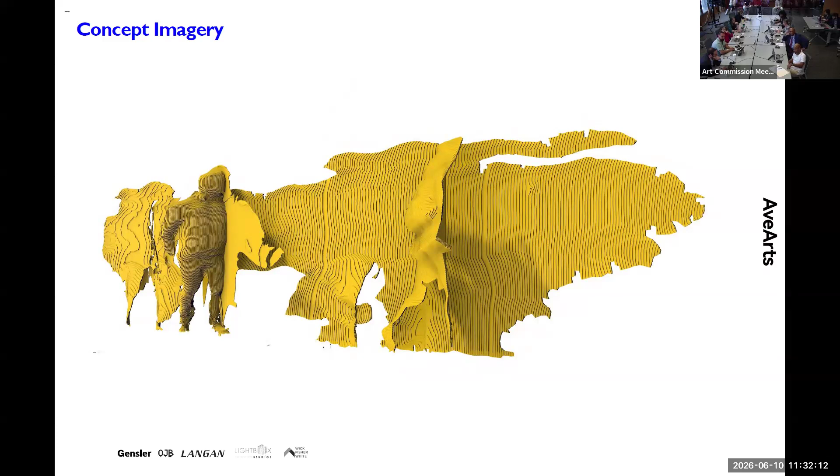I agree, especially something that's meant to be seen in space and time, to be able to move around it, even if it's at a small scale, it would be very helpful. So a small mock-up would be great - a small scale mock-up of these pieces.